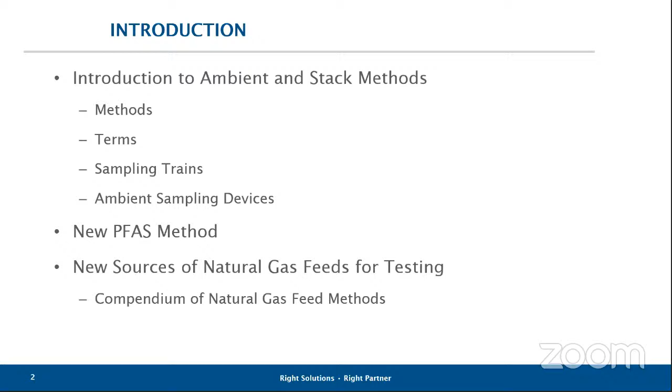I wanted to, again, give you an introduction to ambient and stack methods, the terms, what sampling trains are all about, ambient sampling devices, and also I'll give a brief introduction into 2 new and what I perceive as hot methods for stack emissions. One of them is perfluorinateds, and the other is sources for natural gas feeds into the natural gas networks.

First of all, I'm going to bore you with some issues of terms and try to make sure that people have a level understanding to go through this presentation. The last one, the sampling trains, is what I'll talk about first. Sampling trains in stack emissions refer to the connective set of glassware or even stainless steel or Teflon parts that constitute a sampling, and that can include a nozzle probe, say a filter, and maybe impingers or something along those lines. And after that, an umbilical cord down to pumps and flow meters and so forth. So that's what a sampling train refers to. It's really from the stack emissions.

The next issue, the 4 items in the red are quite strongly related. Particulate versus non-particulate bound, what's a VOC, what's a semi-volatile, and isokinetic versus non-isokinetic sampling, all very heavily correlated, and even the metals, volatile versus non-volatile metals. A lot of the analysis targets are particulate bound, but whether they're particulate bound or not is dependent on the temperature of the stack, on the boiling point of the targets, and the affinity to the particulates. So this is what in the stack methods differentiates between VOCs or volatiles and semi-volatiles on the organic side, whether or not they're particulate bound.

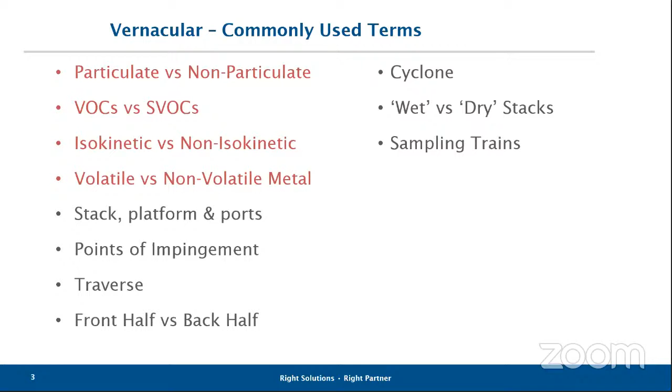Now, stacks don't have to be combustion sources. They can be dry kilns. They can be even vent stacks of all sorts. But stack testing methods need to accommodate when their sample is at a source where it's a wet stack. And I'll get into that a little bit later on the sampling train design.

Now, classical stack methods. I'm not expecting everybody to be able to list these methods. On the left-hand side, there's the targets, and on the right-hand side, there's some of the methods appropriate for them. I have EPA, California Air Resources Board, Environment Canada method references, the EPA SW-846 reference methods. So some of these come from different sources in different areas.

But we in Burlington do all of these methods, including dioxins, PAHs, and PCBs. We do PAHs and PCBs by both low res and high res, dioxins exclusively by high res, other semi-volatiles by low res. We do VOST, which is a volatile method, which includes sampling.

It's a stack method for sampling VOCs onto solid sorbents. We do multi-metals and mercury, and anions is listed. That's actually HF, so acid gases, HF, HCl, HBr, Br2, Cl2 are included in these methods.

The method 26 and 26A are EPA methods. One of them is isokinetic, the other is non-isokinetic. Gives both options for those targets. Ammonia, CTM, or conditional test method 027, we offer filter particulates.

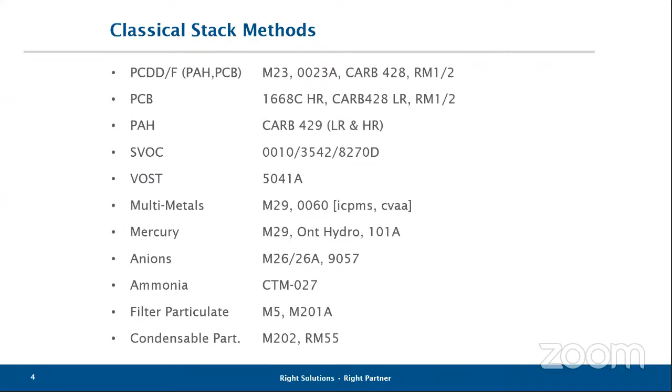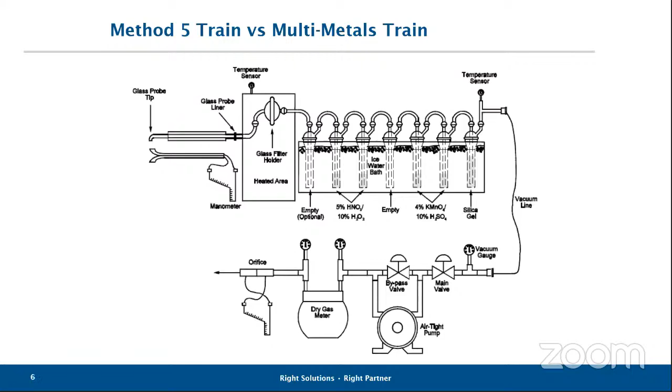I've also shown you a slightly different approach, and this is sometimes called a modified method 5 train or a semi-volatile train. It's common to the dioxin methods and the CARB methods for PAHs and PCBs and dioxins.

So it's a general semi-volatile approach, very similar in structure to the other trains that I was showing, except the types of impingers or the content in the impingers in this section here. This section here is where the gases that are drawn in go through a condenser, drop the temperature, and of course, if there's any moisture, it drops the moisture out. And so then the gases and moisture go percolating through the XAD trap, which captures a good deal of the SVOCs.

In general, most of the SVOCs are captured on the filter and in this region here. But beyond here, there's also a dry knockout and a couple of water impingers. Water impingers for the EPA methods. The Environment Canada version uses ethylene glycol and water. Now these trains, whether the metal trains or semi-volatile trains, each of the different components get recovered by strict protocols, and those components get sent to the lab for analysis.

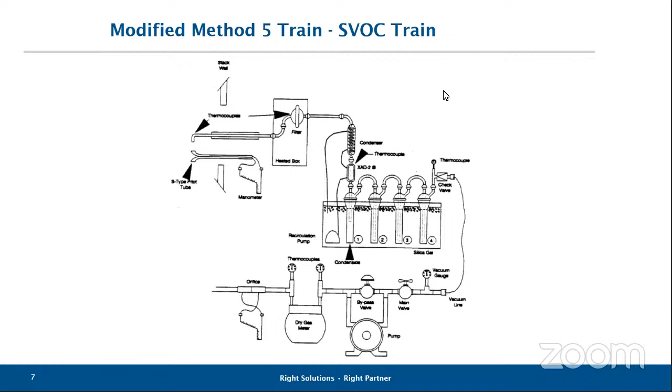The before was what it looks like in diagrams. This is what it really looks like in a real stack world. And you'll see here, here's a probe. There's the port in the side of the stack. You've got the huge stack here. So you'll see that the train is actually suspended on a rail here, which fortunately for the testers takes most of the weight. So just pushing that in and out is how they do their points. And of course, they take it out and then they have to rotate all of this huge piece of equipment across 90 degrees to the other port and do their traverse and do the other portion.

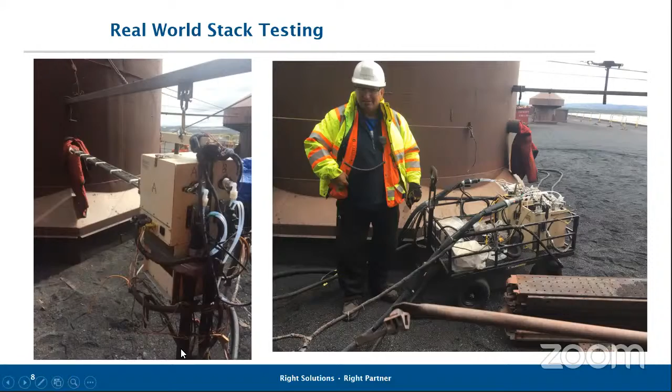Now, I think in this, the chilled portion of the impingers is down here. You'll see it in this area here. And so there's what the impingers look like, and this is the impinger boxes. And so this is again part of the process. You'll see that the port has been covered up to protect the staff from emissions after the sampling port has been vacated. So that's what it really looks like in the field as far as stack testing. And again, you'll see these cords and umbilical cords, which would go down to usually a trailer. It looks like this is a stack on top of a rooftop. That's my guess. And a little bit unusual that the port's so close to the roof, but that's that particular source.

Here's an example, pictures of some of the typical ambient sampling devices. The device on the left here is a Tisch sampler. This is a cover roof, which is like a pyramid. And you'll see two hinges here that just flip down to cover and yet allow flow up and around the cover into the sampling. You'll see different types of options as far as sampling heads. This sampling head is the metals particulate type sampling head for an 8x10 quartz filter. This is the semi-volatile sampling head for the TO-9 dioxins or the TO-13 PAHs or the TO-4 PCBs and pesticides.

There is a filter that goes in this section here, which is about a 102 millimeter filter. There's a glass cartridge with the PUF or resin or PUF and resin cartridge that goes in this bottom section. So these are different sampling heads that go into this type of sampling device. You'll see a pump down here. This takes 110 or 220 power, and a timer here in order for it to automatically start and stop in your 24-hour location, wherever you're doing it.

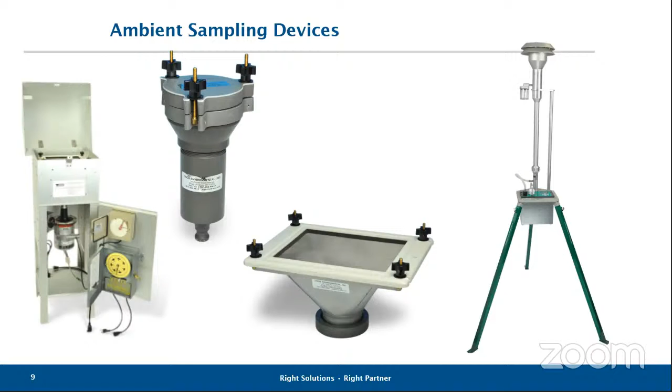This item here on the right side is the other type of ambient sampling option. This uses a 47 millimeter Teflon type filter. So this is the M212 type method for doing particulates and/or metals. It can include a cyclone so that it would capture only, say, PM2.5 or PM10. These types have the advantage that although it's a lower flow, it allows for battery sampling for 8 or 24 hours. And so this is also quite popular, especially in remote locations. The lower flow means that the filters have to be done on microbalances rather than on four-place balances.

Now, this slide is just a dump of bits of information that I thought was important to pass on.

And if you remember, on the first item I talked about high volume versus mid volume sampling types, the high volume about 300 cubic meters. And if you are analyzing for air toxic quality, to meet the sorts of ambient air quality criteria needed for dioxins or benzo(a)pyrene, BaP, you really need the high vol methods. And I've given the example of Ontario ambient air quality criteria for dioxins and total TEQ and BaP. These really need to be high vols rather than medium volumes or the industrial hygiene methods to get to those levels.

Now, that doesn't mean that's what your application needs. The other methods for PAHs, for example, may be applicable if you're concerned with higher levels of PAHs, which is quite common. But really, if you want the low limits and you're really looking at ambient type quality criteria, the high vol methods are the ones that you really need to use.

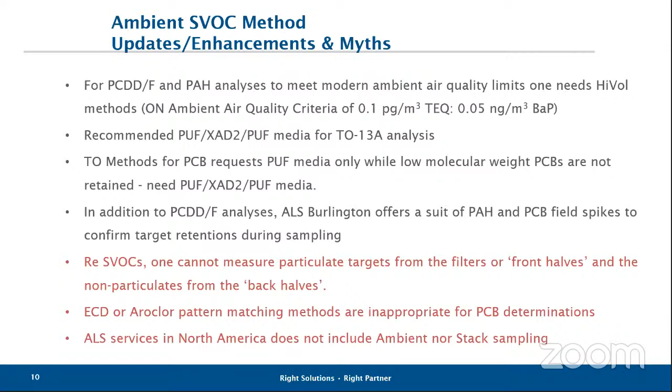There is now a major stack testing firm, Montrose in the US, and actually in Canada as well, that also has laboratories. So that's a little bit different. But we maintain what we believe is the integrity of separate analysis and integrity of samples in that sense. So we don't get involved in both areas.

Now I'm going to shift the presentation entirely to a couple of new areas of stack testing that I see as being hot and emerging. And the first one has to do with perfluorinated targets. About 5 years ago or so, there was some work done on groundwater levels around a couple of the manufacturing facilities for perfluorinateds.

And what they discovered, to their surprise, was that the pattern of groundwater contamination showed that the primary source of that groundwater contamination had to do with rain deposition. And so that realization has all of a sudden put a great emphasis on what's coming out of these stacks and how far they're being transported and so forth. So stack methods, although there was some work on it, have gone to a much higher priority.

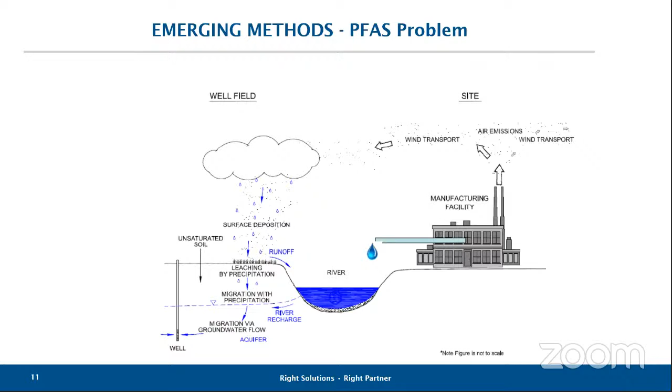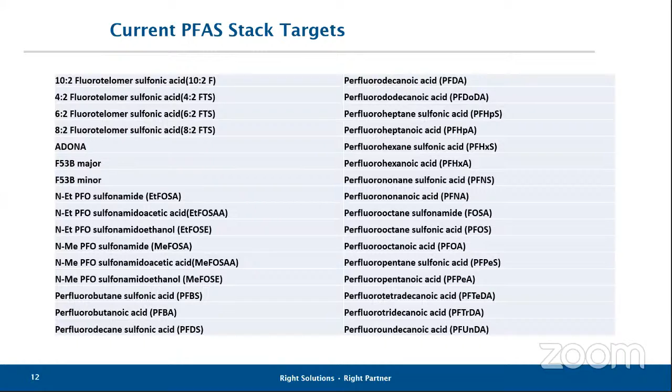These are the plethora of targets that we're currently analyzing for perfluorinateds in stack emissions. And the target list for perfluorinateds continues to increase and will continue to increase. So this is what I would call a snapshot of what's being offered.

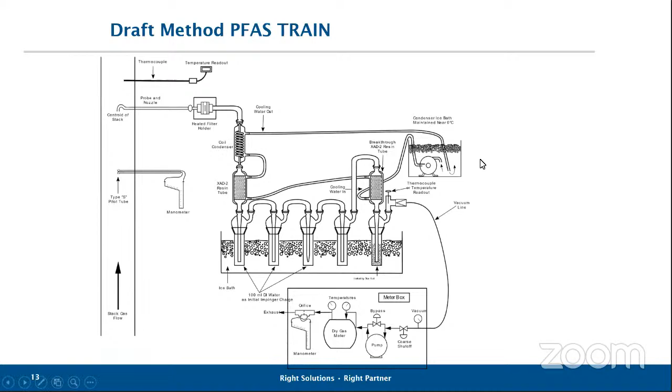The other area of interest that I see as being a great expansion now and going forward has to do with greenhouse gases and the collection of greenhouse gases, specifically methane. I'm sure you've been familiar with capturing methane from landfill gases that's been going on. And the concept, of course, is capturing these emissions and putting them back into the natural gas feed lines for distribution and use, as far as burning and whatever else uses the methane through those systems.

Now, it's not just because of landfills. We're now morphing into another phase. The capture of methane and feeding it back into natural gas feeds is going down to the level of farms, capturing from pig and cattle farms. Of course, the poop associated with that. And they're capturing it and putting it back into the natural gas feeds. So that's why this is really expanding, because it's going to the level of farms.

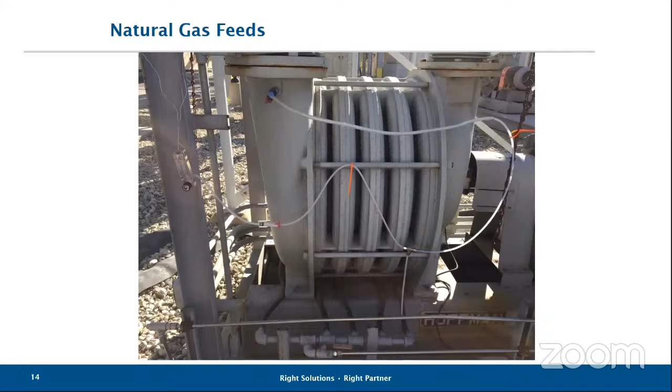And that's what's happening. And the next couple of slides will give you the sorts of analyses that are being done. This work here is being led by Nicole Bryson, sales agent for the Simi Valley Lab. She's really been driving this and has put together great comprehensive packages associated with the industry targets that they're looking for and the concentrations. And that's multiple packages because there's different target lists and different standards that are being done.

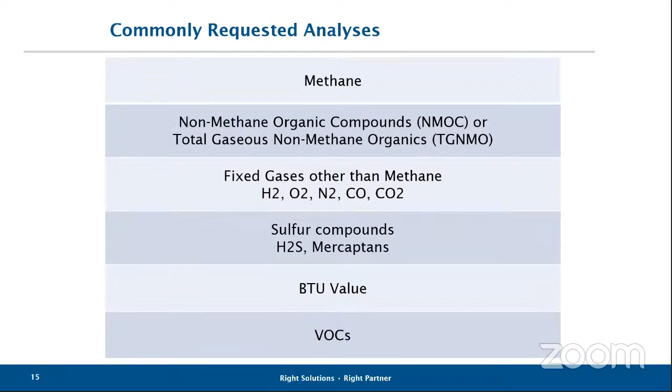But this first page here is a lot of VOC analyses and other analyses that are being done on these. Siloxanes are really an issue associated with landfill gases. It has to do with polysiloxanes in landfill. When they degrade, they give off some low molecular weight siloxanes, volatile siloxanes, I think D4 to D8 range. And these are a problem as far as burning the methane is concerned, because when you burn the siloxanes, you

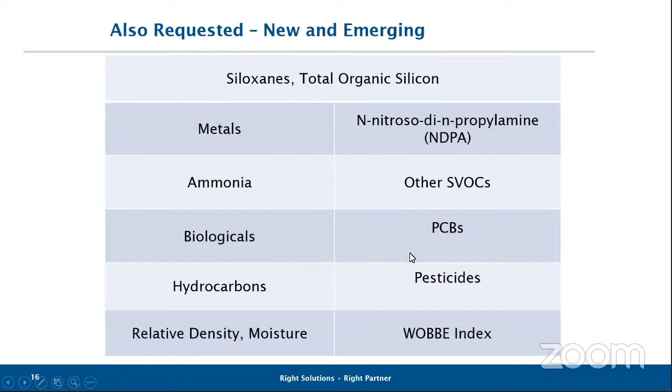get silicon dioxide. These other items, N-nitrosodi-n-propylamine, other semi-volatiles, pesticides, metals, these are the areas that we're supporting in our lab on this. Metals may be at our lab or industrial hygiene methods, Salt Lake City. Here's a summary table of one of these type lists, and it gives sampling reference methods and instrumental methods.

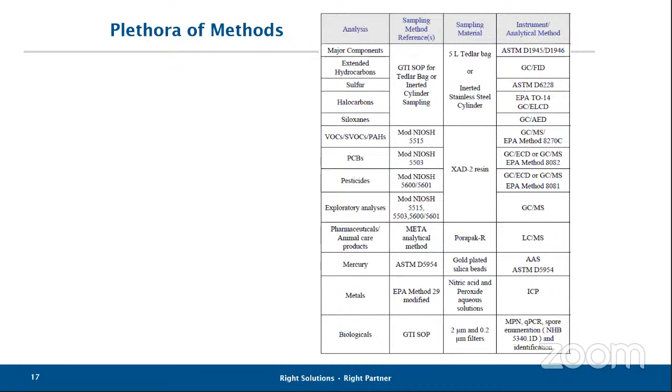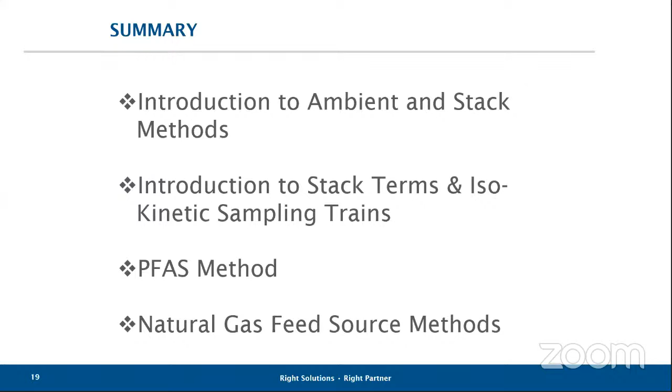overall, in summary, I hope I provided an introduction to ambient and stack methods, helping your understanding of the terms and what's being done and why, and also given leads into the two areas that I see as hot areas going forward: perfluorinated and natural gas feed sources. So at that, I leave it open for questions.